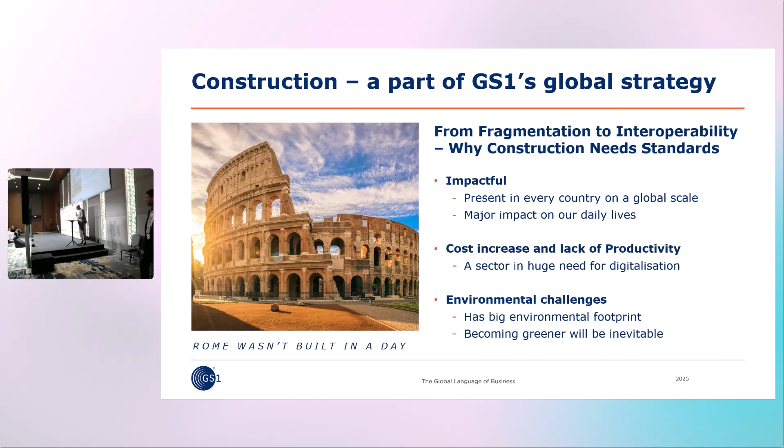So, showing this slide, we are working together with the industry on a global scale. We saw the need to support the industry on a broader scale, and especially in Europe.

So in 2021, GS1 in Europe launched the concept Center of Excellence Construction with six pioneering member organizations. This has now grown to 15 member organizations over the world, especially in Europe and Asia Pacific.

This team is led on a daily basis by Ildiko Lieber, who should be here today, but unfortunately couldn't make it. So Ildiko, if you are watching, the team and I wish you the best.

At our global General Assembly in May this year, we decided that construction became a part of GS1's global strategy. When that became a reality, we also voted in the first-ever construction industry representative at the management board.

And that was Mr. Thierry Bercy from Sika. You can see from his background on the screen the relevance of having him in this position. So I leave the floor to you, Mr. Thierry. Thank you for participating in this.

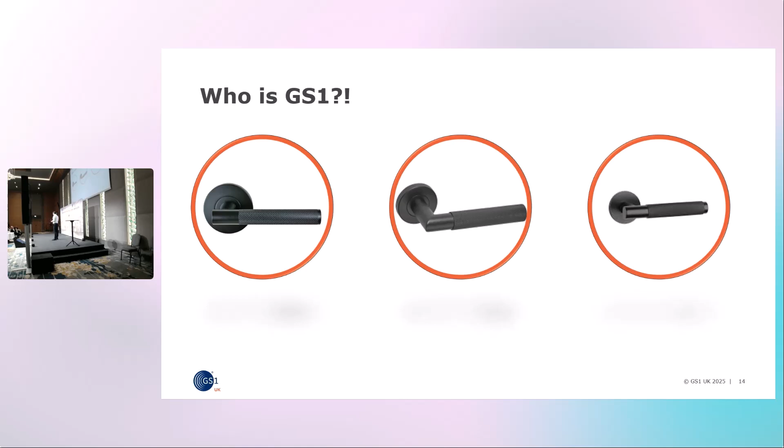So, who is GS1? I'm sure this is a question for some of you in this room. Imagine you are on a site and you receive three door handles, but only one of them is compatible with the fire door. This is not an exaggerated case - this is happening on construction sites for different items and metrics. These three examples are from three different manufacturers, but only one is compatible with fire doors. This is a challenge on the construction site, but it's not a challenge anymore in other industries like retail or healthcare. How do they overcome this challenge? By uniquely identifying their products. When you uniquely identify your products, the chance of misidentifying products on site is almost eliminated.

We are, as Geir mentioned, a global organization. We are in 120 countries. And we're not new, we have been in business for over 50 years. Already 2 million companies are using our GS1 standards, and our barcodes are being scanned 10 billion times a day. We are in more than 20 different industries.

But our core values, as I mentioned, we are global, not for profit, so we're completely neutral. We work with all industries and all members and stakeholders. Our standards are open, accessible, and can be used by the whole supply chain in the construction industry. We are industry and user driven. We listen to the industry, understand their needs, and develop our standards based on their needs.

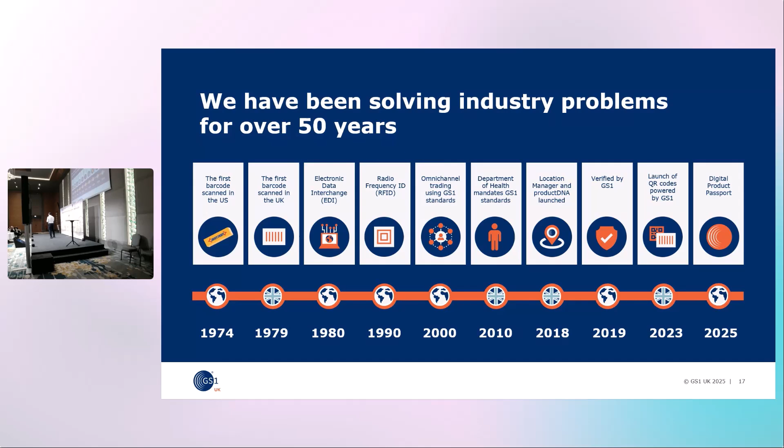So I mentioned our history. This is just an infograph that shows where the journey started. It goes back to 1974, where the first product was scanned in the US. We came a long way from 1974 to 2025, when we're now talking about digital product passports.

But all we do is based on three simple steps: identify, capture, and share. So when I'm talking about identifications, we are talking about 12 different identifications for 12 different reasons.

But these are four of them that I picked for today. Global Trade Item Number, or GTIN, is the barcode that you see almost everywhere, in supermarkets, retail—it's the number and barcode you see on almost every product in the shops. We also have a unique ID to identify locations or functions, called Global Location Numbers.

We also identify assets, going to the instance level of products or assets, and we call it GIAI, Global Individual Asset Identifiers. And when it comes to tracking or tracing pallets, we have SSCC. But as I said, this is 4 out of 12 different identifications.

But what does it matter? If we search for a product by part number or SKU numbers, you won't end up with one product. You will end up with multiple products because manufacturers use almost the same numbers. But when you use a unique ID, the chance of getting to two products is almost zero, because our numbers were always unique. Since 50 years ago until today, every product had a unique number and will always remain unique.

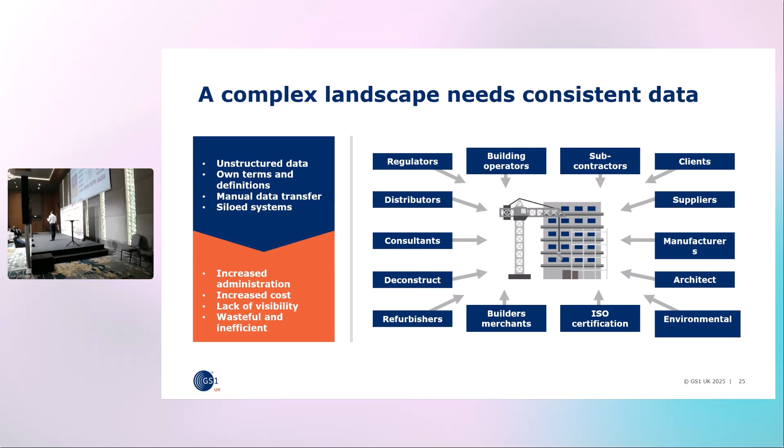And that's how GS1 standards can improve that. But why now? Coming from the construction background, I can tell you it's too late—but okay, we need to start at one point.

So there are three key reasons. One, regulations. There are so many regulations across the globe. Some of my colleagues will cover a few of them. But in the UK, we have the Building Safety Act, where you need to capture product information in a digital way, which can be accessible at any time by anyone who needs to have access to that information. Again, that's not going to be possible if we don't use a common language, a common way to identify our products.

Digital transformations - we are at buildingSMART International, so we all know that the construction industry is in the middle of its transformation. Again, I mentioned that my background is in digital construction. Connecting the digital world to the physical world without having a common language, which is global, interoperable, and consistent, is almost impossible. We can do it in silo, but it's not going to work.

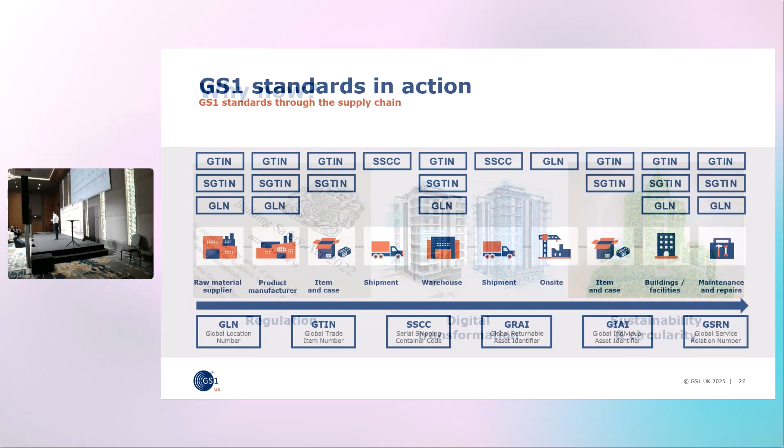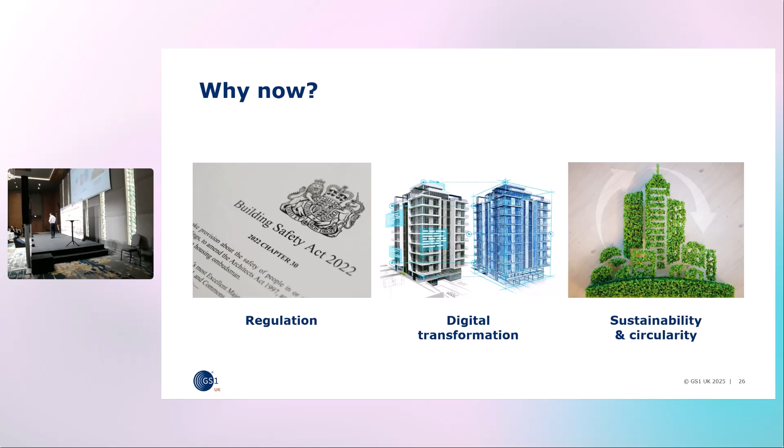Last but not least, sustainability and circularity. We are moving from a linear industry into a circular industry. So in order for us to identify a product or how to recycle a product in 60 years time, 50 years time, we need to be able to trace that product back to its origin. That's only possible if we're all using standards that are interoperable, global, and consistent. My colleagues will cover part of the circularity in their presentations later on. This is our standard across the supply chain, from raw materials to construction and post-construction. At the top, you can see where different GS1 standards play their role to create that traceability and make the stream of information easy from start to finish.

So Geir mentioned about the Center of Excellence. But why are we collaborating together? We would like to share experiences. We would like to know what's happening on the other side of the world, so we don't need to learn the same lesson over and over. We share best practice, share all our lessons learned. We are trying to shape policy, and we believe together we have more power to do that. We don't want to shape the policy in one country - we would like to shape the policy across the globe.

We are working with associations when we are developing standards based on industry needs. We don't want to develop a standard for one nation or one region. We would like to make sure that we are satisfying the needs of the industry across the globe. That's why we're working together.

So you'll see my colleagues in this room from different countries. During the break or at the end of the session, please come back to us if you have any questions about GS1 in your country. Just to finish, we have gathered case studies and best practices across different countries, and we are happy to share that with you, because if you want to start your journey with GS1, we don't want you to learn all the lessons that have already been learned by others. We like to help you, support you in your journey.

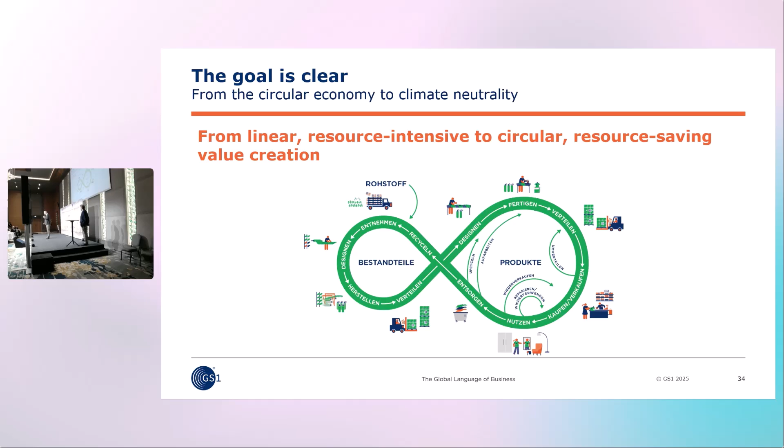This concept is not uncommon. If you look at the comparison to the vehicle market, this has been vastly used over the ages. We all have our cars regularly maintained, we repair them, we may sell them, and the parts are recycled. All this is done using, from the concept side, a vehicle identification number which is globally unique, and with that every car on the globe can be identified uniquely.

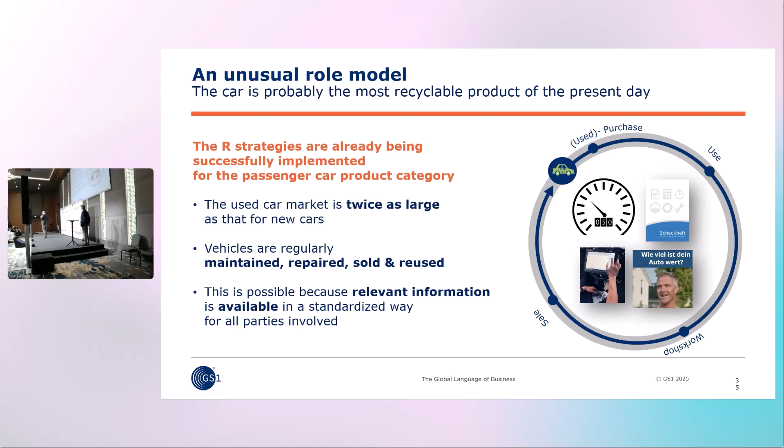Then you have the vehicle registration document, which contains certain information referencing the vehicle identification number. You can draw the analogy to the digital product passport underway - just the same concept used for other industry segments and product categories.

Therefore, the DPP will provide transparency which will help, on one side, the consumer to make more informed decisions, but also serve for better market surveillance.

This slide is overloaded, but it's just to make you aware that it's not just the ESPR to take into consideration - there's much more. Taking the broad overview, the big picture, I won't go into detail, but you need to be aware that many of these aspects interrelate with the subject of the DPP and therefore contribute to its implementation.

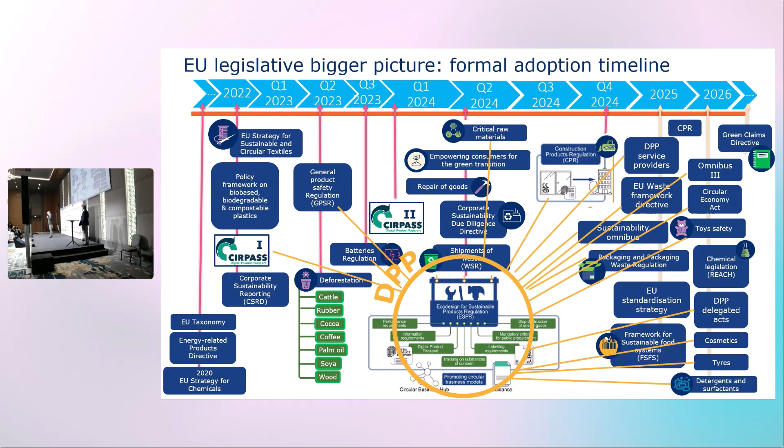So it's the ESPR regulation, but more than that on the regulatory side. There are delegated acts which will define for each product segment the mandatory data elements and attributes. There are harmonized standards under development, important for complying with and being in conformance with the regulation. There are results out of EU-funded projects which help from a practicability point of view to implement the DPP. We'll learn in the next presentation results out of one of these projects.

Talking about standards, currently the European standardization bodies CEN and CENELEC have a joint activity to provide harmonized standards to define a framework for a generic DPP, which will serve different product categories, including the construction part. These standards are currently under development.

They cover subjects like unique identification, data carriers, interoperability, security elements - all these kinds of things. They are quite far in progress. The next step, in the upcoming few weeks, is developing final draft standards, which will then be voted on by the national standardization organizations, members of CENELEC.

Then they will be published, expected by the end of Q1 next year.

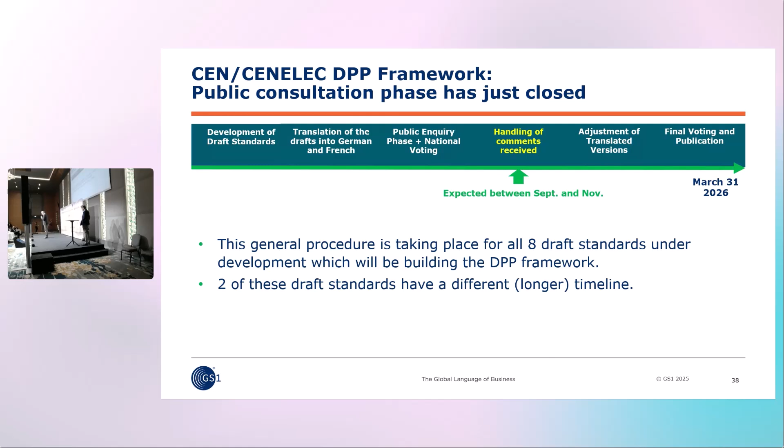If you draw the comparison line to GS1, how does it correlate? As I mentioned, unique ID, data carriers, interoperability - these are all subjects also covered by the GS1 system architecture and the different standards we provide, as mentioned in the previous presentation. Therefore, GS1 standards are predestined candidates for implementing the DPP.

How this could take place, I will give two examples. Both refer to the provisional GS1 DPP standard, which has been recently published. It's provisional because, as mentioned, European standardization is in the final stage but not finalized yet.

Delegated acts will also impact the further development of the standard. It already contains core elements which can be used and are compliant with the current stage of standardization. As for the unique identification topic, in the draft CEN standards, there are four different ID approaches.

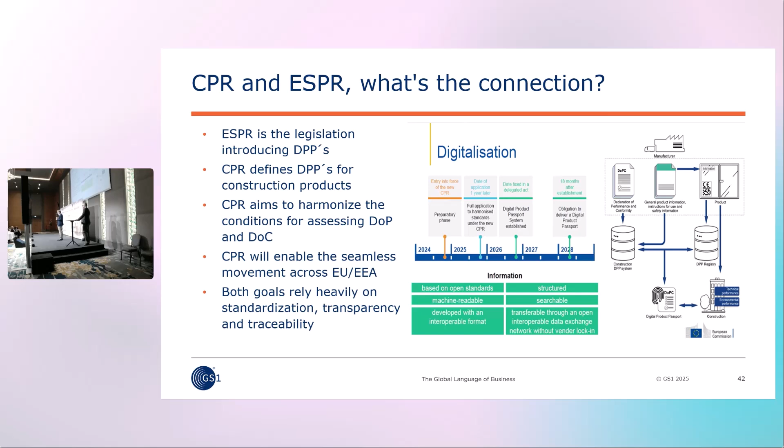I think we'll have a lot of cases diving into this later, so I won't go into detail. But I would encourage you to go to the GS1 in Europe website if you're interested, and look at the position paper, which goes more into detail on how GS1 standards can help you fulfill the legislation, specifically CPR.

So with that, I give the floor back to Geir. Thank you. Thank you, Andreas and Knut.

On conferences like this, there is, of course, a lot of theory. But let's move a little bit away from the theory and a little bit closer to the practicality. Digital product passport is a significant part of the new Construction Products Regulation. And now you will get input from a European Commission-funded project with the objective to deploy and validate digital passports in real-world settings and scale. So for the next 20 minutes, I'm pleased to announce Aurélie Escobar, Executive Director of GS1 France, and Lars Fredland, co-founder of Cobuilder. Welcome to the stage.

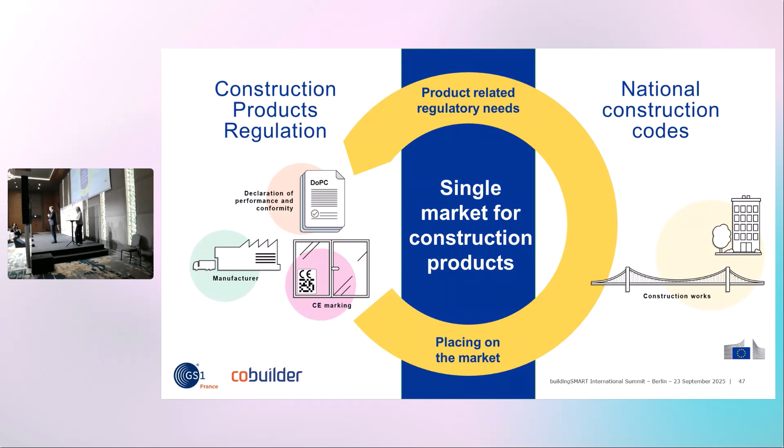Yesterday I mentioned something important to this work: there's a new requirement on sustainability. Construction industry is big, and the Commission has looked at construction as having a major impact on waste, energy, and carbon. That's why the regulation now also stresses this new aspect, alongside technical performance, fire, and environmental performance.

Also important in the work we're doing, yesterday I explained the regulation has a data dictionary, but also data templates. There's a data template that will be developed under the delegated act for DPP, the standardization request from each and every technical committee, to develop a framework for a data template holding the same data across product A, B, C, D. This is very specific for CPR. So data templates, ISO 23387.

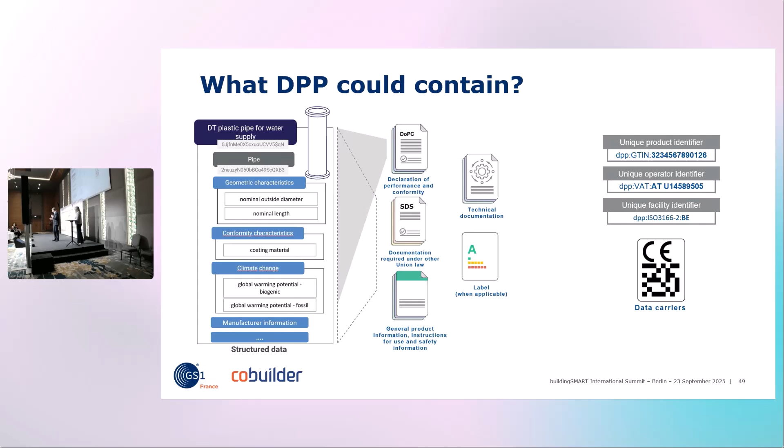What's important when you look at the last slide is that there's a DPP registry, which is the data carrier. Then you have the DPP, the construction DPP system, which is more on the information side. But those two things are linked together—that's important.

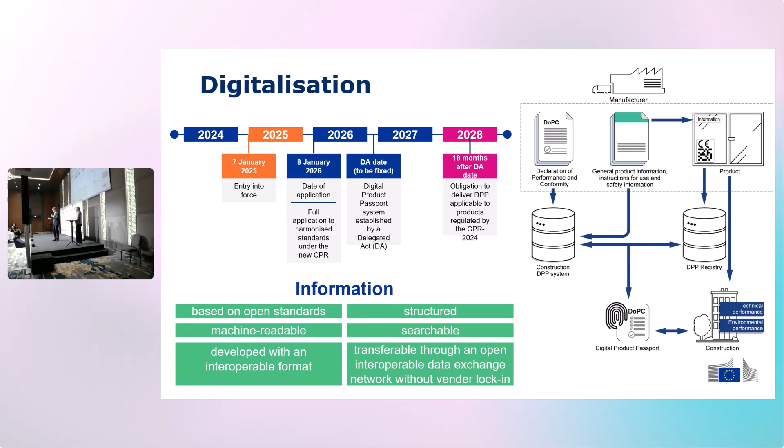Data governance is key here. We talk about interconnected data dictionaries. There will be established a European data dictionary with an API that any actor can access and use. It could be reached by APIs, but could also be used in other dictionaries, like the buildingSMART data dictionary—meaning there's interoperability via dictionaries. So you have two options on how you want to share that.

I think what we will demonstrate here is the work done using such a dictionary coming from the Commission with those templates and properties. We're using that with Velux on the use case with Autodesk Cloud, on how to set requirements for fire and other factors using the template, providing that information to Velux, which knows what to deliver for that specific project—that's made to order. And then we have off the shelf.

Thanks for this introduction and summary of the regulation. So going down to CIRPASS 2 and what we're doing.

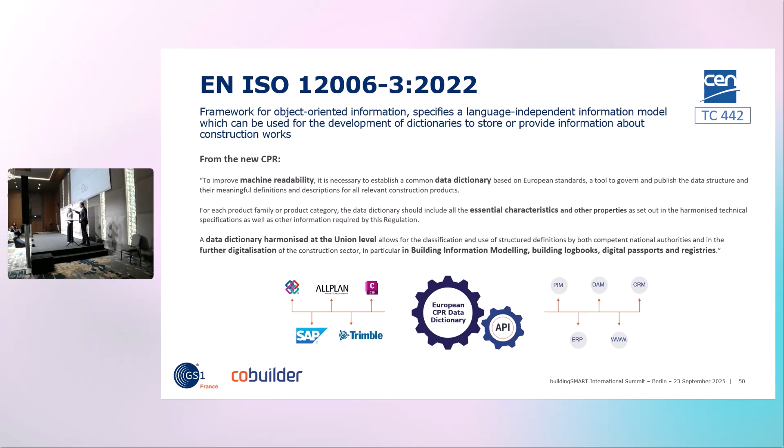This CIRPASS 2 project is a European-funded project with 49 partners working together with different pilots. The main objective is to deploy and validate DPP at scale in different value chains. The second objective is to contribute to standardization efforts—we learned about the CEN-CENELEC standardization work, which is also part of the CIRPASS 2 objective.

Another objective is demonstrating circular economy business cases using DPP, and last but not least, supporting the deployment of DPP. There are 13 lighthouse pilots under the CIRPASS 2 project: some on electric and electronic equipment, on textile, one on tire, and one on construction.

So what is our objective? The main objective here is to demonstrate the practical application of DPP in the construction value chain and industry. Our aim is to enhance information exchange and collaboration using DPP and interoperable standards. We're going to demonstrate usage of DPP with two different value chains: a make-to-order product and a make-to-stock product, focusing on digitalization and sustainability during this project.

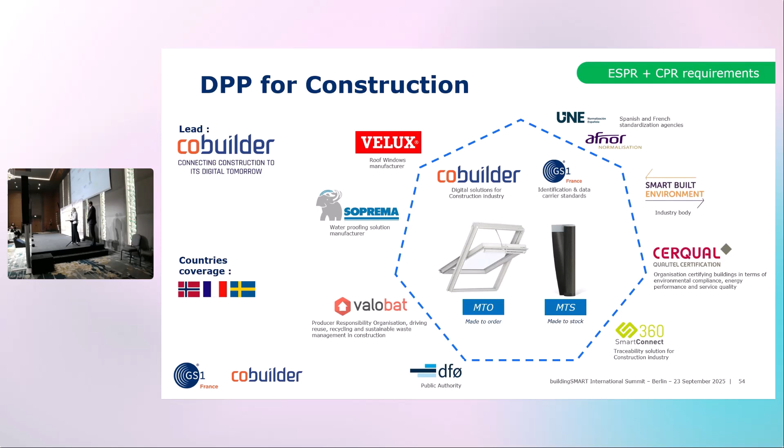We're working with many participants and different partners: manufacturers like Soprema and Velux, Valobat for the circular economy operator, DFØ as a public authority, 360 Smart Connect as a traceability solution, Cerqual as a certifying body for construction, Smart Built Environment for construction bodies, and standardization bodies—the Spanish UNE and a French standardization body.

So we're all working together, and what we're doing is—well, you know about this project lifecycle in construction industry, I'm not explaining something you don't know—going from generic requirements, all about building information modeling, to more specific requirements until you have more detailed product information because it's linked to the product itself.

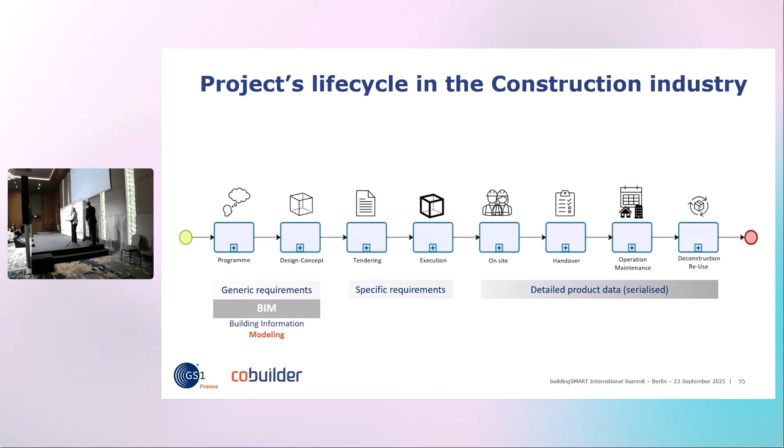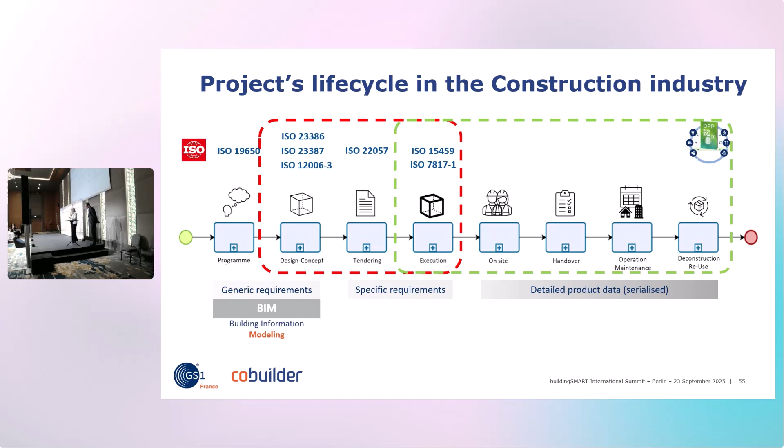For the stakeholders, you have a lot of standards to structure data, as Lars was saying: a data dictionary, data template, but also environmental product declaration, level of information, or even product identifiers and data carriers. The green box is all related to the product itself and the digital product passport. On the left side, if you need to develop a correct DPP, you need structured data beforehand. So what we're doing is connecting the project flow with the product flow through the power of GS1 standard and buildingSMART standard.

And in the middle, you have this QR code or another kind of data carrier, like a data matrix, for example. But this QR code is really key because it's making the link between the digital representation of a product and its physical representation. So we are going a lot further than just building information modeling, and we are more talking about building information management because it's going through all the life cycle of the product and the project.

So it's really important. It's really useful at the construction site, and you know what is in front of you. You know if the product that you have is really fulfilling the requirements of your client. So it saves time, as Sherving was saying at the beginning, saving time and money for the actors on site, but also throughout the value chain.

Last, do you want to present the cases?

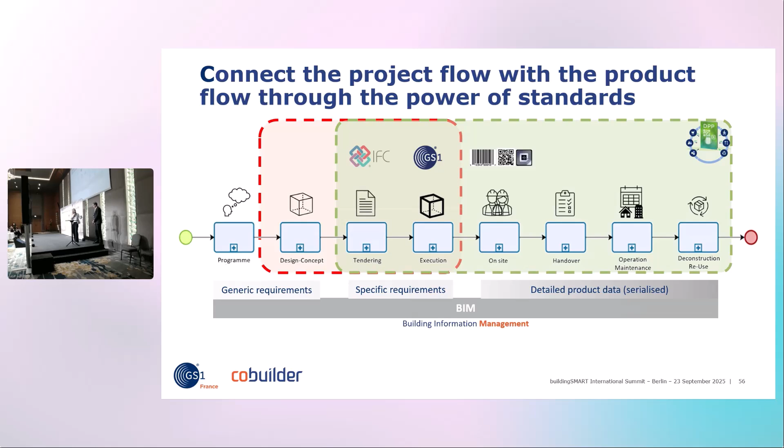In this use case, we use Autodesk, so it's ACC Autodesk Cloud, to add requirements. So that comes from a LOIN, so that's a level of information need. We can do IDS and checking, validating data.

We have to declare the values. So the question is, what is the needed information for the manufacturer? As an example, when you design as an architect, it's like 12 to 18 properties. The need on the manufacturing side is around 50. So there's a delta, and that is sales people today. There's a lot of communication on PDF and Excel, which we are showing that we can remove.

And moving forward on this, it's also important to say that we are looking at the procurement process. We're looking at reporting according to CSRD, so Corporate Sustainability Reporting Directive. Nationally in the Nordics, it's much about LCA, so LCA assessments for buildings. So we support delivering data to that, and also, of course, showcasing the digital product passport and all the benefits that GS1 standards provide, which is huge.

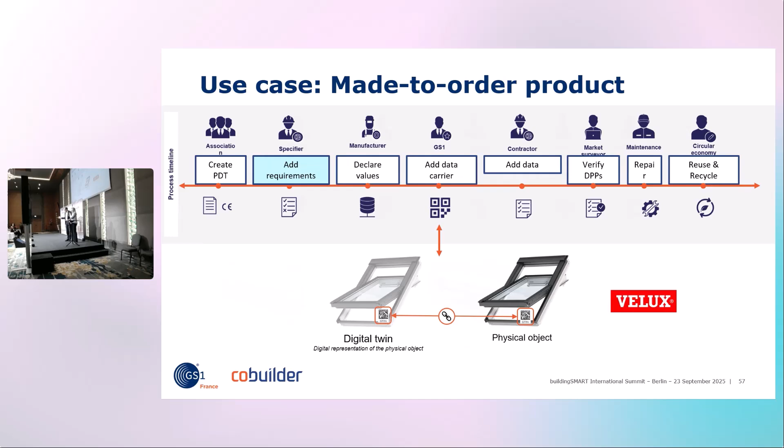And Aurélie, you can take the next one, which is Make to Stock product. In this case of make to stock, the manufacturer is producing its product and putting them on the shelf. When the product is ready, it is available to deliver this digital product passport, using data to access this information and make the link with the requirement of the client, ensuring that this product will match the requirement of the contractor.

So it's at this point that again this QR code is making the link, bridging the physical and the digital world, and then the DPP will be useful for market surveyors, as Lars was saying, or even for the manufacturer when doing repair or maintenance operations, or at end of life, deciding whether you have to reduce, reuse, or recycle a product.

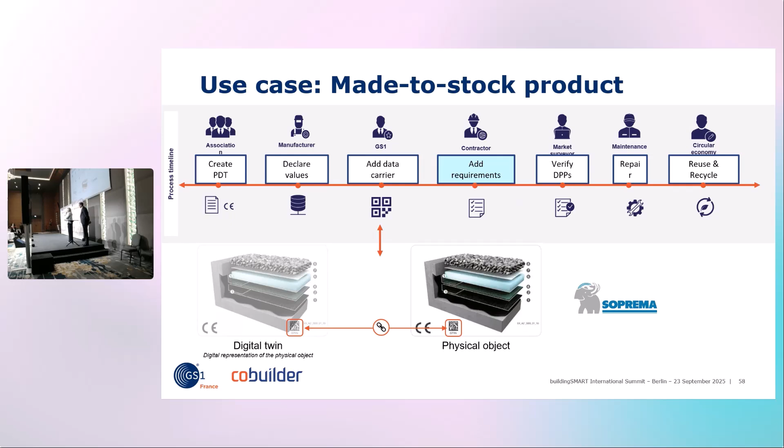So as the last slide, what we're demonstrating here with this CIRPASS2 project is the benefit of using DPP with unique identification, linking it with interoperable standards like the buildingSMART standard. This is very useful for all the stakeholders in this value chain, because from the contractor's point of view, you are sure that there's compliance between the requirement and the product put in place, and it facilitates regulatory compliance as well.

When you are on the construction side, you're saving time and money because with a simple scan, you access all the data that you need on your daily work. For the manufacturer, having a unique identification of the product helps calculate the carbon footprint, but also share information through a data carrier. When you are a facility manager, you can maintain a product as long as possible, or even do preventive maintenance because you've got the information.

When you are a circular economy actor and you want to extend the lifespan of a product, you've got this information and you're able to make the right choice, whether to reuse or recycle, and how to recycle, because you know what the product has lived and the different operations on it. So all of that is really helping or supporting sustainability and circularity, reducing the impact on raw materials and extending the life of the product. So thank you for your attention, and I give back the floor to Pierre.

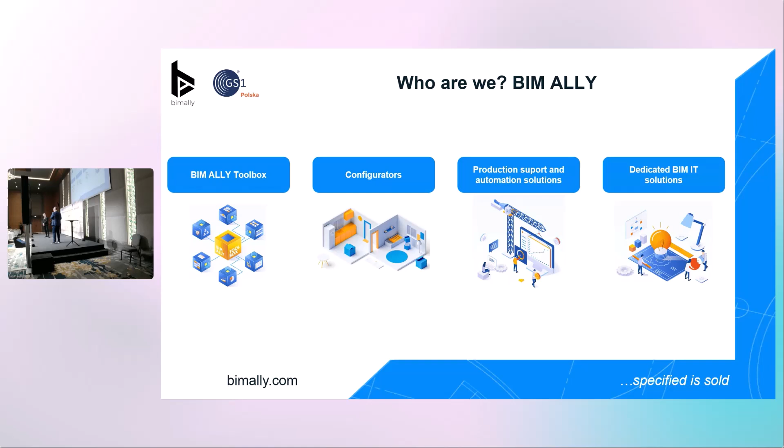Ladies and gentlemen, what we actually do in our business case is BIM Toolbox. Our main product will take only 2 minutes to explain, and then we'll jump into the real case. BIM Toolbox is basically a tool for manufacturers to introduce their data, providing automations as well as generators. We also provide configuration support for companies, production support and automation solutions, as well as dedicated BIM IT solutions. As I mentioned before, we did some R&D work in our IT department, and we introduced a tool which quite quickly transformed into a new startup.

And we are quite happy that we have now moved to the third round of financing. So it looks like this project is going quite fast, and it's providing some good value. We are a proud member of buildingSMART Polska, and I'm very happy to be a leader of the data for construction subgroup in a working group called GRAI, which is an AI working group by the Ministry of Digitization.

As a result of work for that working group, in October last year we published a report called SMART, where we introduced 7 postulates, including the need to implement BIM into legislation and make it compulsory. We also provided our opinion on the CPR regulation in December last year. Thanks to strong support from buildingSMART Polska, we have conducted 2 studies in the Polish market. If you're interested in what is happening in BIM Poland, I'm linking you to bimally.com/reports. You can type it into your search engine, jump to those reports, download them, and check how BIM is being used among manufacturers as well as designers in the Polish market.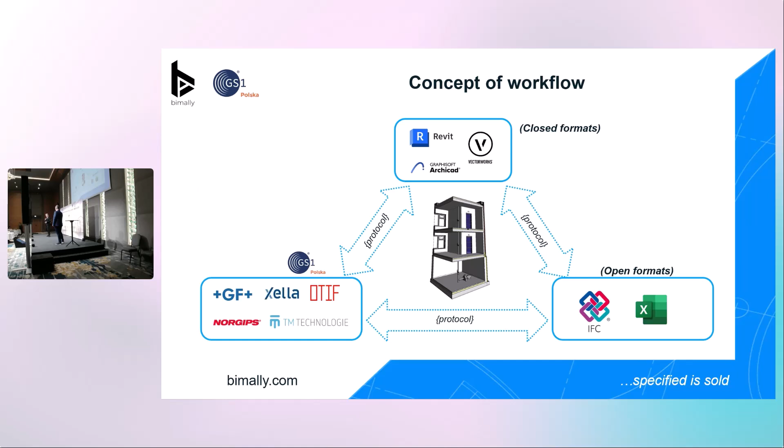Okay, for today we have prepared a proof of concept where we try to show how DPPs and BIM models work, and how to use the information that stands behind the DPP to make real value for construction. For this proof of concept, we use 3 data sets: tools and native software like Revit or ArchiCAD, manufacturer-specific data, and open formats like IFC or spreadsheets.

Why DPP? Why actually use it? I think you've all heard nice information about the value it brings, but it actually brings a lot of value for the entire life cycle of the building, from the design phase to construction, maintenance, and the end of cycle of the building, giving the product a second life. So the investor can choose a product wisely, thinking about the building and making it bigger value for it. Designers are going to have much better control on carbon footprint. They will have clear access thanks to the templates that will be delivered together with the DPP.

The data will be structured, so it will be easier to compare. On the construction side, it will be very easy to validate. If GTIN code would be a standard solution on every construction site, it would be very easy to scan products that came to the construction and check whether we have everything we actually need.

Manufacturers will be obligated to deliver DPPs. It also brings them an opportunity and creates transparency on the products, along with some competitive advantages. Facility managers will have access to the data 24 hours, 7 days a week, making it easier for them to maintain the building during its life cycle. In the end, like the previous presentation mentioned, it will be much easier to decide which product we can reuse in the next building, and if we demolish a building, to do it selectively, thinking about what should go where.

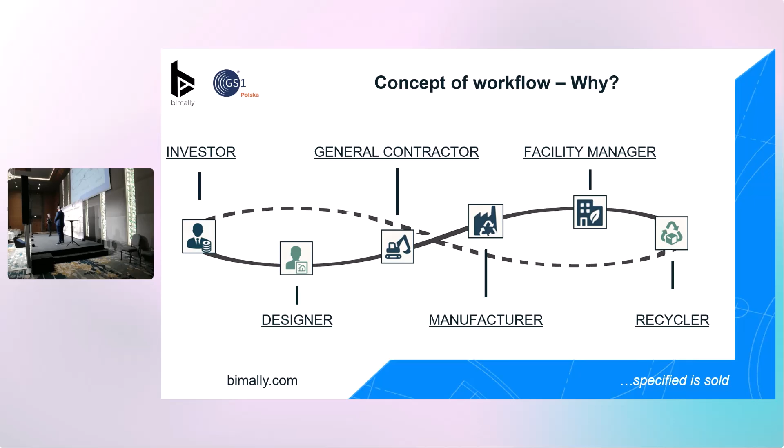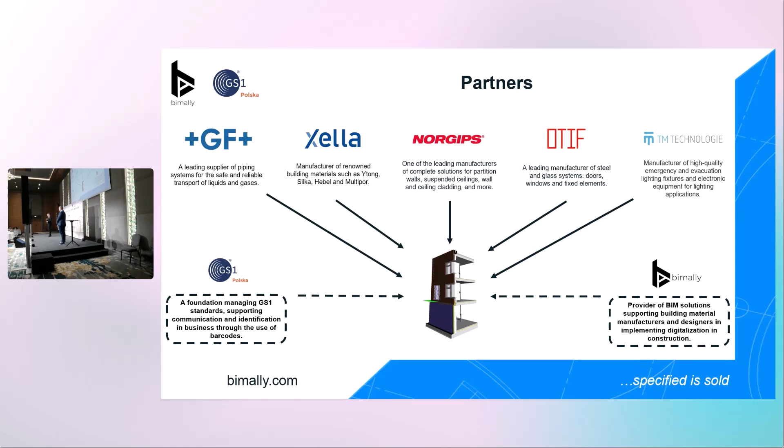So for this project, we worked together with GS1 and manufacturers that wanted to be part of this proof of concept. They shared the necessary data with us, and for this proof of concept, I assume that the GS1 product catalog could be a central hub where GTIN codes are stored.

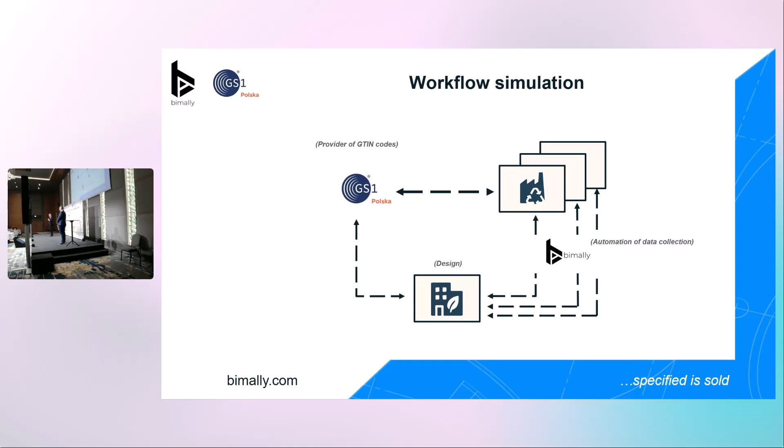Manufacturers already work with GS1 a lot, they use GTIN codes in their daily business. Designers have access to the product catalog and can search through the GTIN codes, values, and categories for specific products. As Bimally, we already provide a tool, which Piotr mentioned, a toolbox that creates a bridge between manufacturers and designers, allowing us to download information directly to the product.

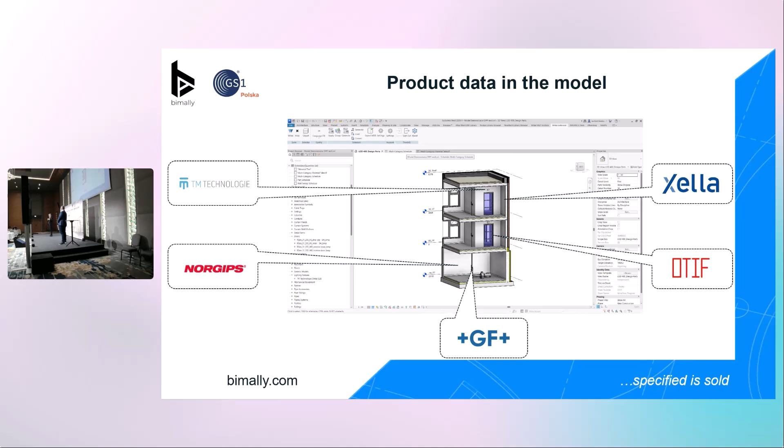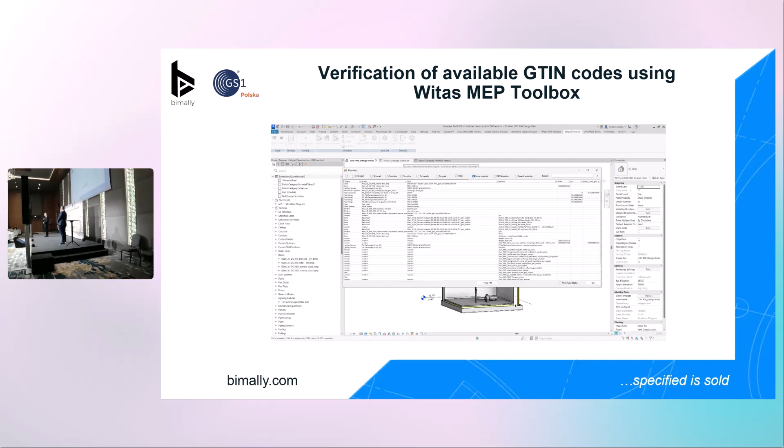In this proof of concept, we used data from 5 manufacturers. Some of them already had BIM libraries, some didn't, some had all the necessary information, but we had to use generic models. While working on this proof of concept, we faced one challenge: since we had BIM models from manufacturers and some generic libraries we were using before, the structure of the data needed to be clear, as everyone mentioned yesterday in the presentation.

The problem was that we wanted to have the GTIN code in a column selected as green, but multiple different parameters stored the same information. That's a very common issue that we need to solve.

Since we are a software development company, it was easy for us to use our solution, Witas MEP Toolbox, which allowed us to automatically map those parameters, explain to the software that it's actually the same value, and push all that information from all the columns into one parameter, using a single name for the parameter.

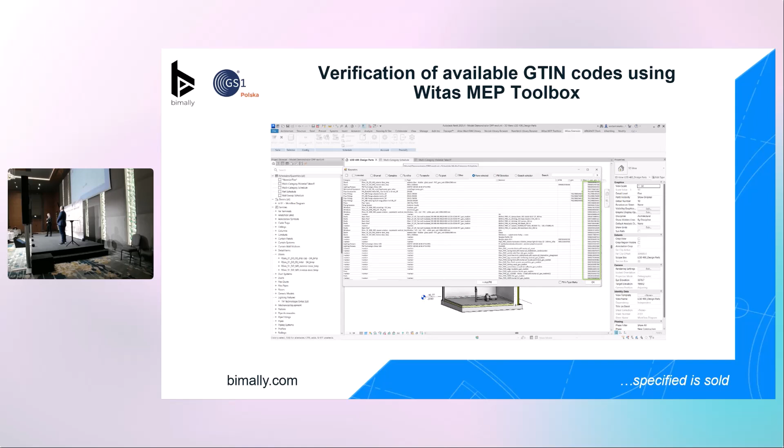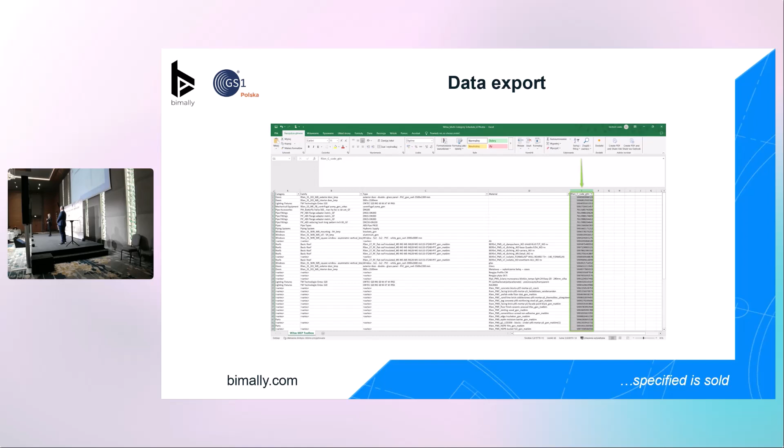This way, we are able to export structured data to IFC or spreadsheets. Architects don't always need all the information. Building managers and maintenance teams need a different set of information. But if we have the GTIN code in place, we can fetch the information that is in the DPP to what we need.

And how can it work right now? It's quite simple. We go to the product catalog, enter GTIN codes, search for the product, enter the product page, and through the product page we have a link that redirects to the DPP. For this proof of concept, I will show the Xella case, where we have created a sample DPP.

This sample DPP shows all the information that Xella provides us. We can find there all the necessary data sets and certificates, but also, in their case, BIM models that can be reused. At the end of this talk, I will share a QR code so you can experience sample DPPs on your own phones.

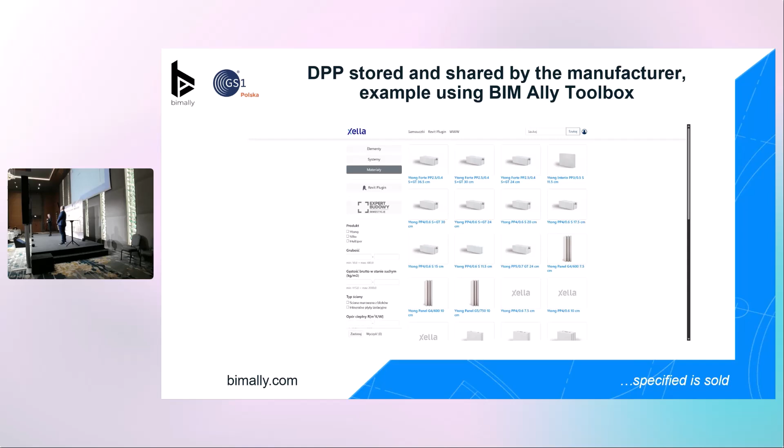For Xella, we have also created a complete catalog of products together with the data behind the products, along with BIM models. As I mentioned before, we created a bridge to link that information to the model. But other manufacturers in this proof of concept don't always have that.

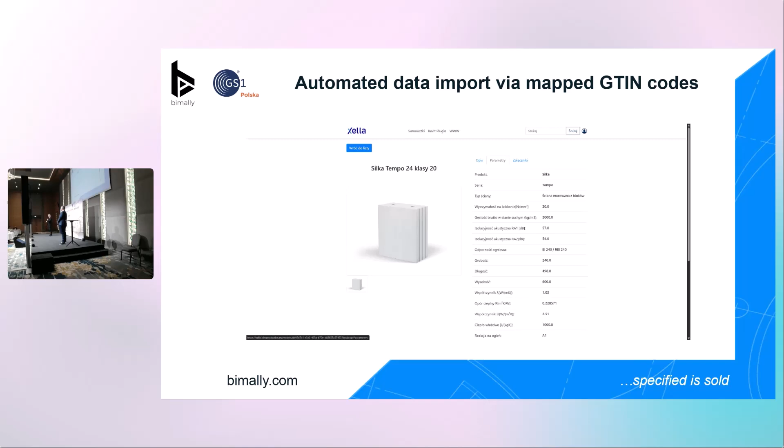So we created a tool that can, in this case in Revit, scan a project for GTIN codes. If those are structured in one parameter, it can then fetch information about the DPP, check that information online, and also load it directly into our project.

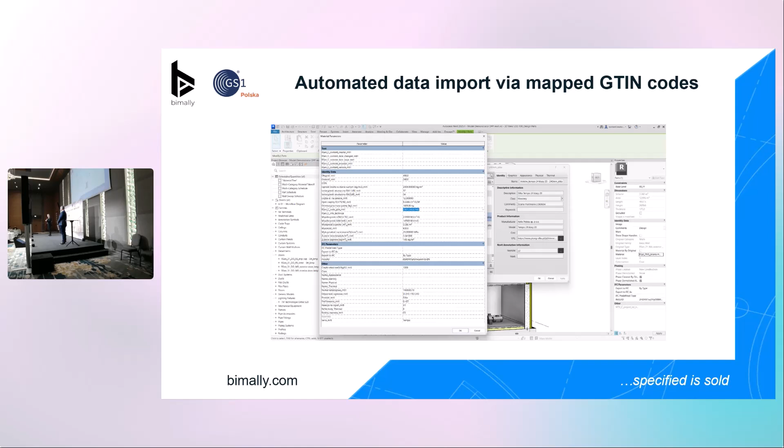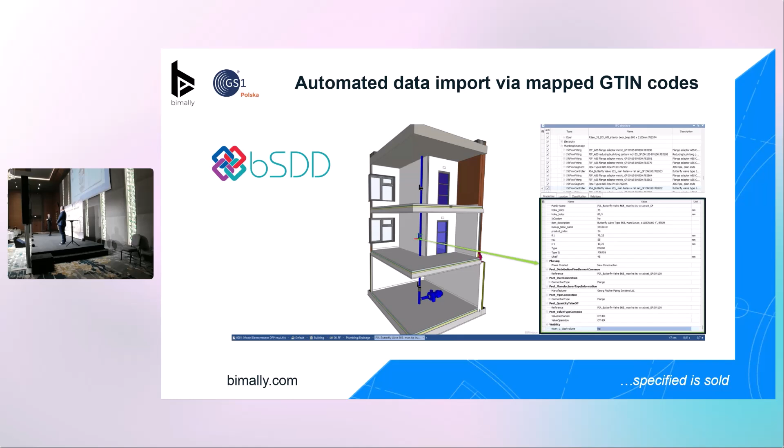As you can see, DPPs are a real value that we can use. They bring the information that everyone in the life cycle of the building needs, and they allow us to compare products and choose wisely.

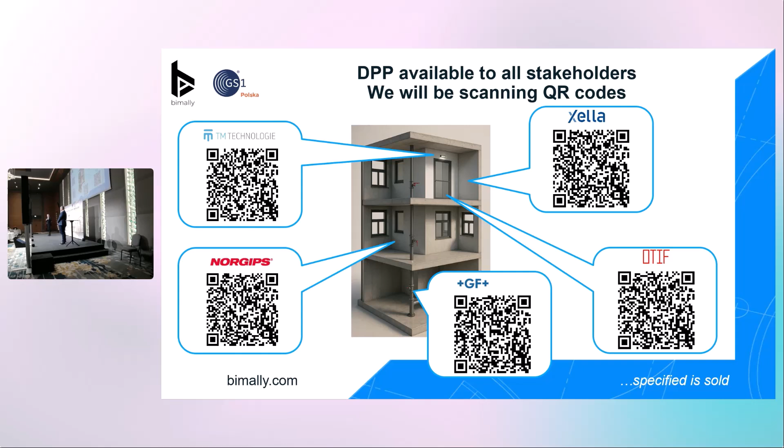So what next? We made this same presentation in Poland, and we had a very big interest in this proof of concept. Then we started thinking, what next? What can we do for the industry to make it live, actually.

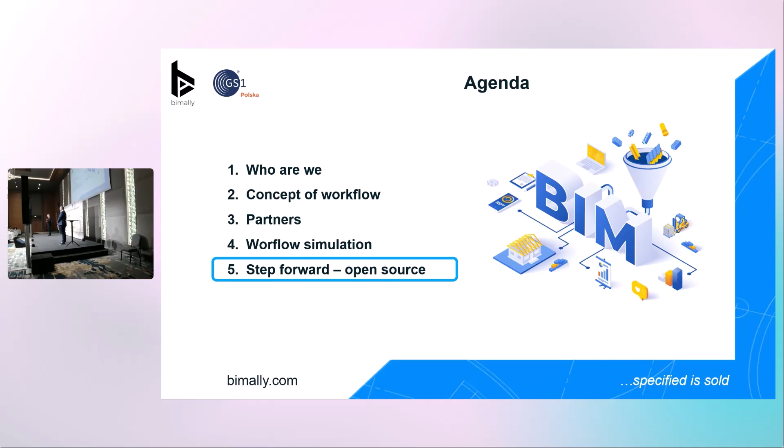So we thought creating our solution, our toolbox, as an open source solution would be a huge step forward for everyone. We imagine a world where every manufacturer can create their own DPPs, put their own data in their own instance of the toolbox. They will be responsible for that. On top of that, we would like to create a central catalog together with GS1 where designers will be able to search for products and go to the manufacturer data, like we've done in this example.

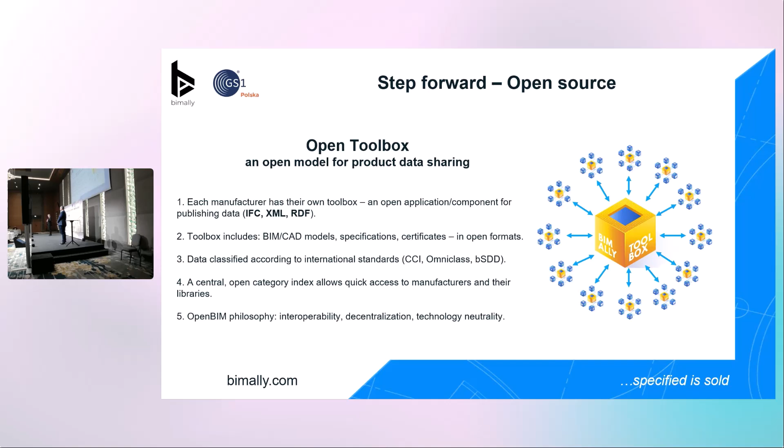Toolboxes allow sharing of BIM models, CAD models, and specifications. This way everyone could have easy access to the information, to the DPPs. Why does open source and DPPs pay off? The manufacturer has full control over its data, not dependent on third-party companies. They can do it better, share data better, and designers have access to always up-to-date data they can rely on. This also allows for interoperability and transparent comparing of products and competition.

Also, with the tool that Piotr mentioned before, which we created as an AI tool, there is a possibility to work with AI on top of the structured data, because AI can only be as good as the input it actually gets.

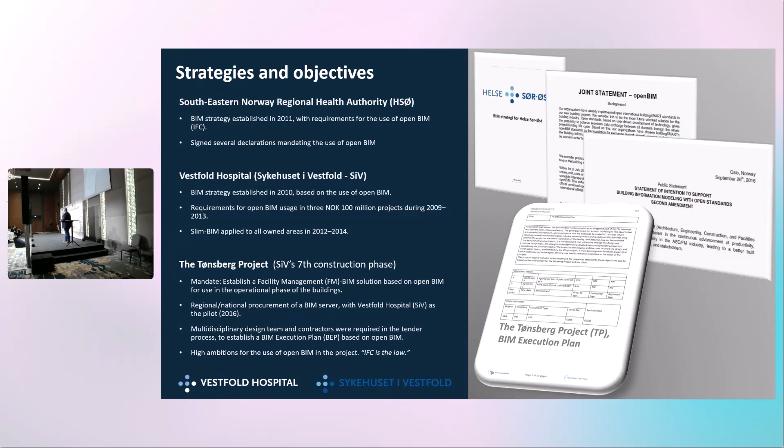We have established strategies for using BIM, open BIM, for several years. We started in 2011, and we have participated in several of these different statements. We have a strategy from 2010, which is related to also use of open BIM. So we have a long history about that.

This is our Tønsberg project, which I was project manager for, for digitalization and interface management. It is an IPD project - it was an IPD project. We had a lot of advantages using that type of contract when using BIM. We had also some disadvantages.

I can't read all of the screen here, so I'm not sure if... We wanted to use GTIN and get into the project, and that was a little bit of a problem within the Norwegian building society and industry. Not everybody was accustomed to using GTIN, and we had to press for that. We didn't achieve getting everybody on board, but we pressed the industry, and we saw afterwards that they changed their attitude and started to use GTIN, because we wanted GTIN to be the main identification in order to connect the object and documentation.

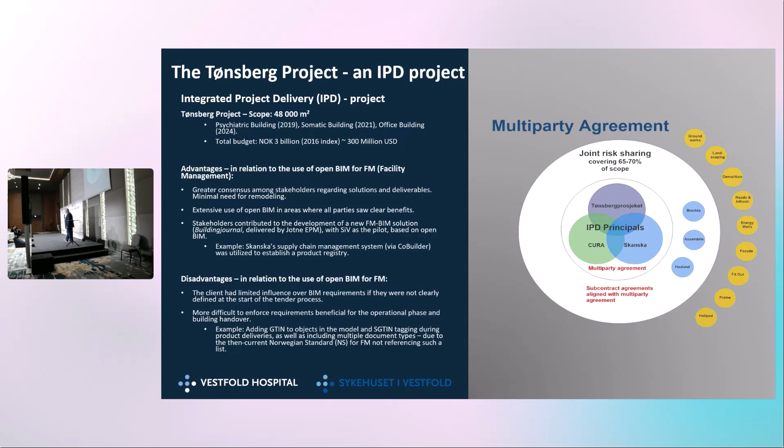We had some experience with the new software we were implementing. It was from Jotne, EPM Jotne - it's a BIM manager system. We had plans which were too optimistic in order to implement that, so it took a longer time to develop compared to what we thought we would.

So we will actually give you a little bit of caution when introducing new systems. Although the personnel at the hospital were eager to get on board, it's an organizational development challenge to implement new policies and the development of the products.

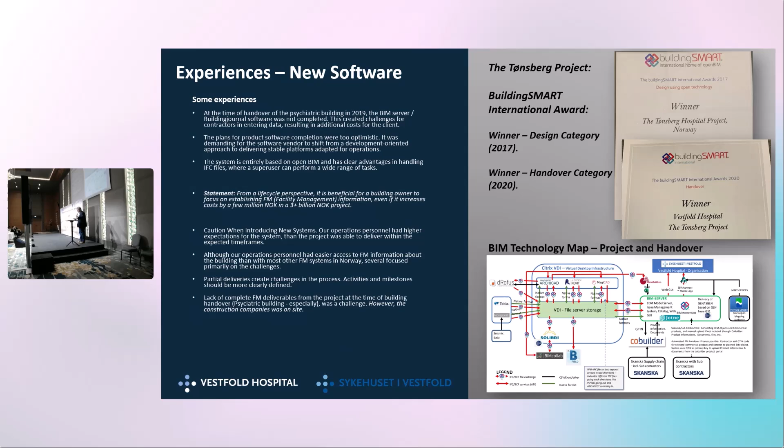Just to mention, we're winner of the design category in the buildingSMART International Award, and we were also winner of the handover category. So we have some experience with this.

Experience from open BIM and building operation: we had planned to deliver models in both native and IFC format, and all the different objects were tagged with the Norwegian TFM system, which is an object identification, used to connect the object and the different FM information.

Through the supply chain of Skanska, we were able to retrieve the FM information from CoBuilder, and that was implemented directly into the system we had. To have a unique identification is very important, and we would like to have GTIN, because then it would be a walk in the park to connect the different objects or the information.

However, since our engineering team was not interested in writing the GTIN into the model, we were not able to do that, so the construction company had a lot of work to connect that at a later stage. If we could get it directly into the model, that would have been much easier.

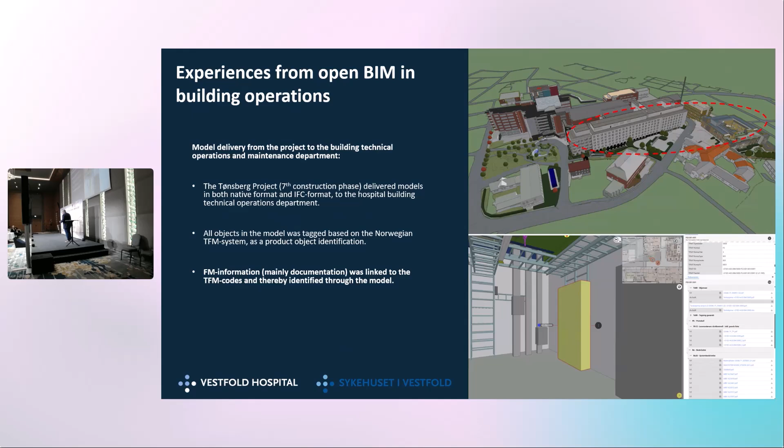The challenges after the handover: software, we had technical limitations. We had instability since we were developing and using it in operation at the same time. That was difficult, and we had technical issues.

Computers were not... let's say they had limitations. They did not have enough power in order to operate such large models.

We had errors, we have deficiencies, you can see it in red - it's a little difficult, there's too much light here. But the differences, actually at the technical room in the first building stage, were quite large. So we understood that we had to check it up much more regularly.

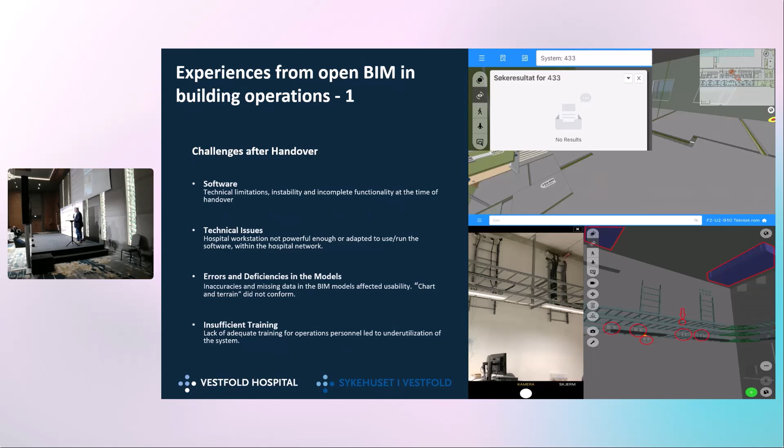After the second part, the BIM and the actual building was quite identical.

Maintenance of the models - we are in a hospital, there are continuous changes, so we need personnel with the correct competence. We have added personnel into our organization to handle different models. We started with only architects and BIM technicians; now we have the whole team with all the different skills needed, and we have also included more tools and licenses to handle the model in the operational part.

We also saw that the models from the engineering team were not correct. You can see an example on top of that - the wall was not completed in the model, but it was built. So we had some of these types of issues, which gave us some troubles.

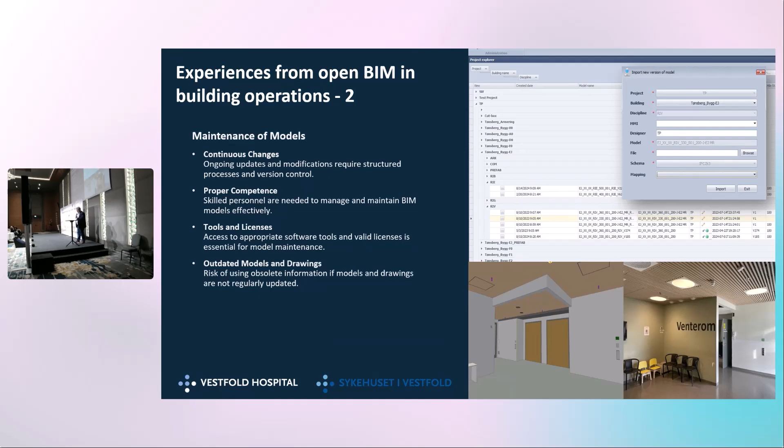How we work today: we have personnel with higher digital competence, we work very hard to have updated models and documentation, and we are working with troubleshooting, planning and execution of tasks in a much more efficient way compared to before. We also use more mobile devices compared to what we started with.

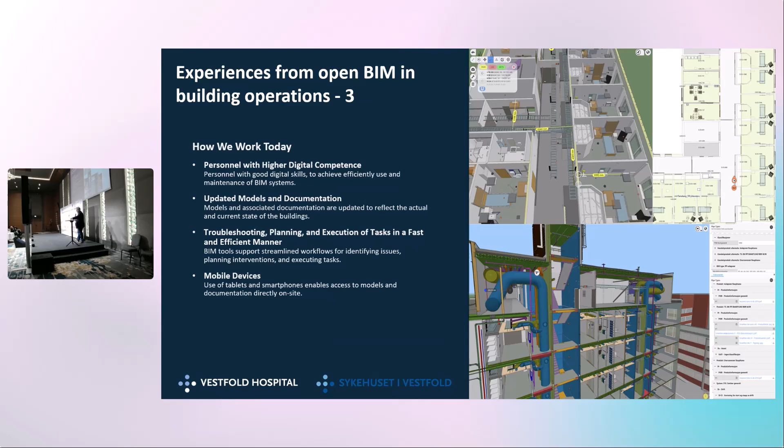In summary, BIM is the future. Transition to use BIM in operation requires planning, and we have some years of experience with it now. We need functional systems, we need complete documentation - so we are cheering on what happened in the DPP presented earlier here - and we need reliable models. We also must focus on training and how to use the tools. That was my presentation, thank you.

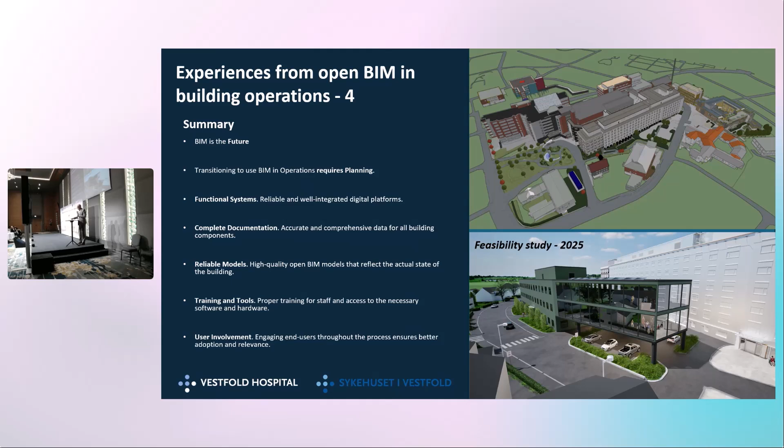Okay, thank you Inge. Bringing theory into practice is seldom straightforward, so thank you for sharing your experiences after doing this for several years. We appreciate it. We are almost heading for the break, but has anyone learned something today? No? I hope so - yes, I see some nods.